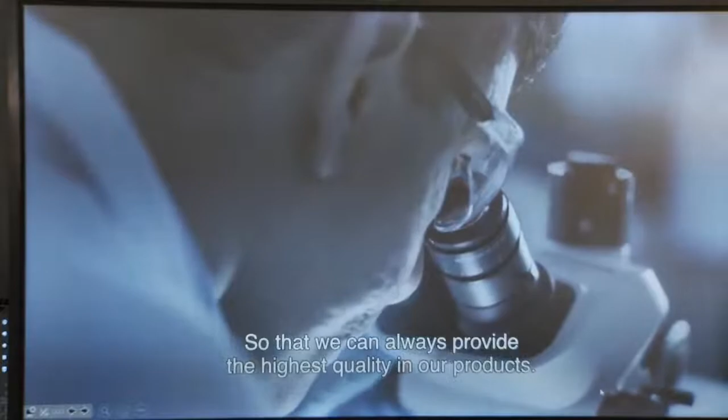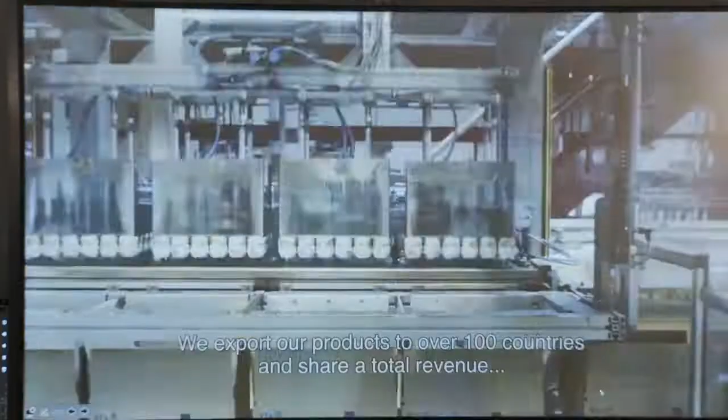40% of all land on Earth is covered with grass. For us, it's the start of everything we do. Deeply rooted within Dutch soil, but also in a rich history of collaboration, innovation and sustainability, Friesland-Campina makes food that is nutritious and tasty. Friesland-Campina is one of the largest cooperatives worldwide, with over 18,000 member farmers. Our goal to provide better nutrition and a good living for our farmers goes hand in hand with making sure we produce products in a sustainable way. Innovation is one of our top priorities, so we can always provide the highest quality in our products. A growing world population and increasing wealth mean a higher demand for food. We are at the forefront of ensuring quality nutrition for the next generation. Our history has led to 140 years of experience, with branches in 34 countries and over 23,000 employees worldwide. We export our products to over 100 countries and share a total revenue of 12 billion euros. And we keep focused on what we know is most important.

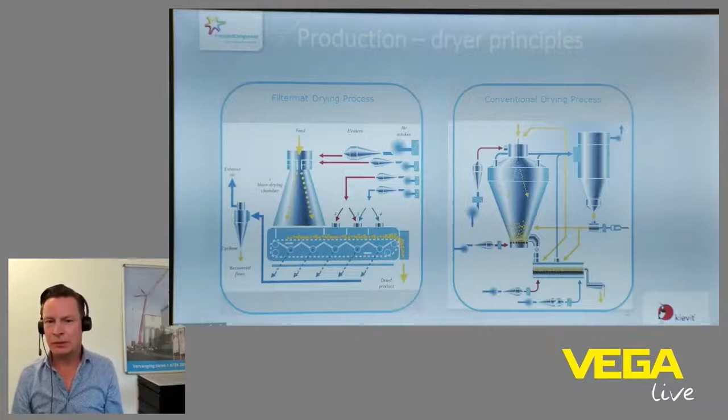A little bit about the dryers: in Meppel we have 3 filtermat dryers and 1 conventional dryer. The filtermat dryer is a special machine.

After we prepare the emulsion in the emulsion line, we pump it under high pressure to the nozzles inside the dryer. The first drying is done in the primary drying chamber. After that, the product falls on a belt, which is why it's called filter mat.

It's a filter belt, and the belt has a double function. First, the product lays on that belt, and the belt distinguishes the air and filters the air from the product. Then, toward the right, there's also the possibility for drying and cooling the product.

In the last section of the filter mat dryer, the product falls into what we call in Dutch the achterbak - it's a trough - and after that we have the rest of the dry processing and the packaging.

In the right picture, you see a conventional dryer. In this dryer, the main drying is done in a big cylinder, and after that, the last drying and cooling is done in an external fluid bed, followed by the rest of the powder handling and packaging.

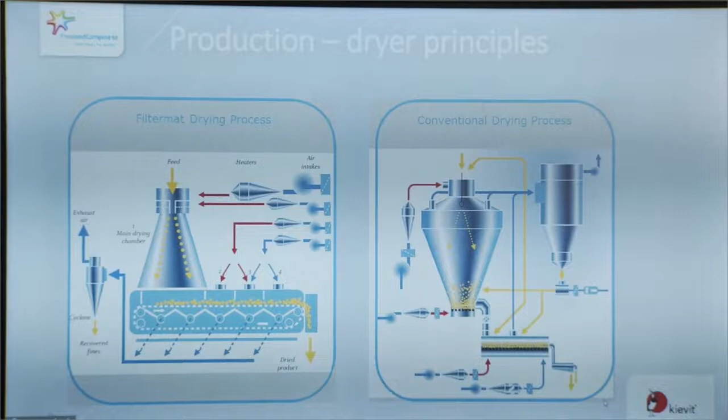For this session, we would like to focus on 3 applications within Friesland Campina, all with a different measuring principle. We're going to speak about radar level measurement, a level switch, but we want to start with a pressure measurement.

First, we would like to speak about an application found in many dairy factories: pump pressure monitoring. In this case, it's used to monitor filter conditions - if the pressure drops behind the filter, it indicates that filter is polluted and you have to start the cleaning process.

The application sounds simple, but it isn't, because if there is a failure measurement or if the sensor breaks, it can result in a huge effort, time and cost consuming to clean or fix that application.

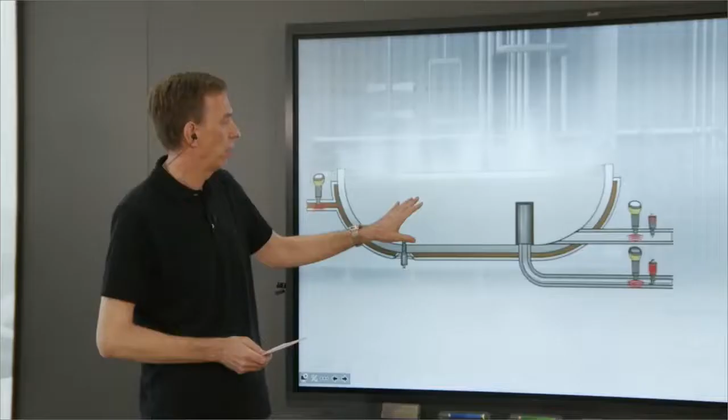We have here a small animation of that kind of application. This is a cheese factory, and here we show how this is working.

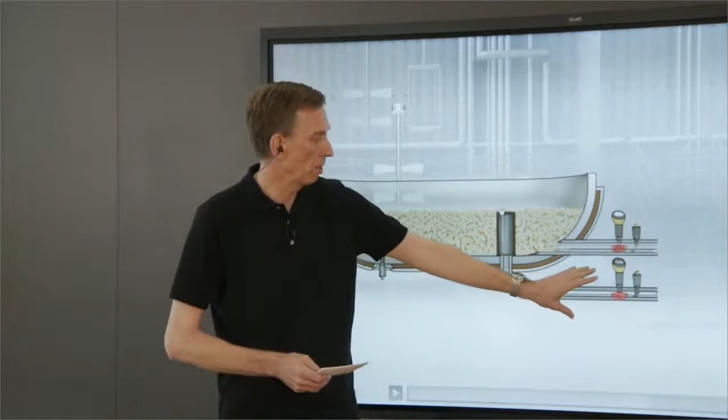You see the bassin for the cheese production and the mixture, and during that process the liquid gets filtered by this equipment. Those devices monitor the pressure of the pumps inside the pipes and indicate any pollution, showing whether cleaning needs to be started or not.

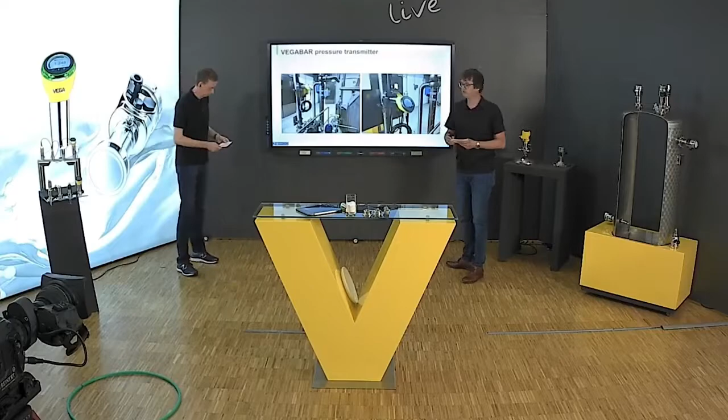This is the application as installed at FrieslandCampina Kievit. Friesland Campina was one of the first companies in the Netherlands which participated with VEGA in the field tests of our new pressure devices - in this case, a VEGABAR 38 pressure device.

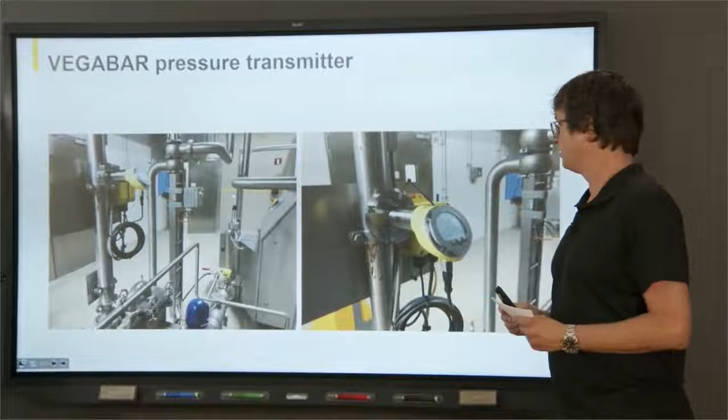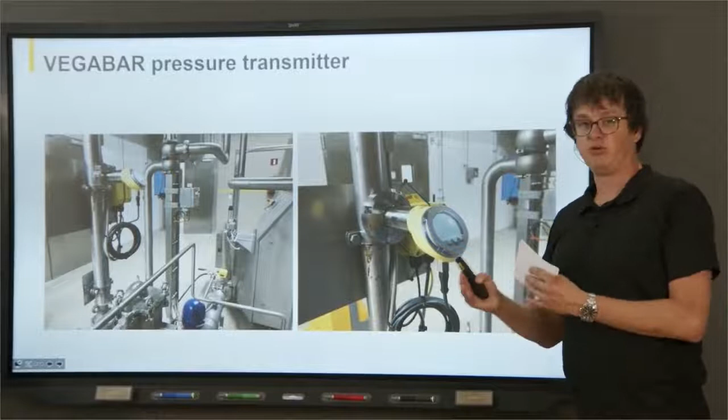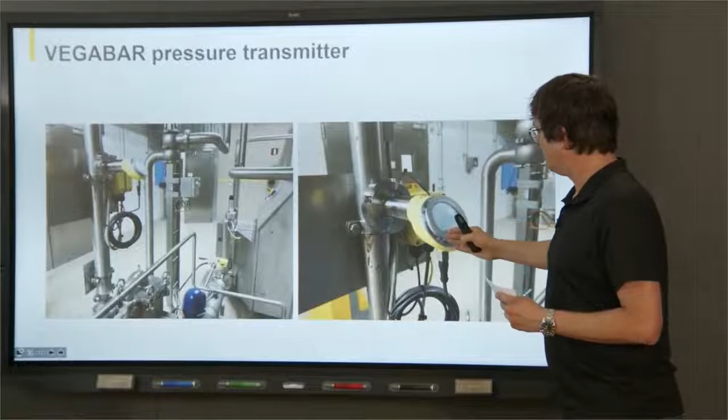What's really nice about this device is the big screen, on which you can both read the pressure the sensor measures and set up the device via the 3 push buttons on the screen. A second feature, not lit on this device but which Holger will show us in a second, is an LED light indication.

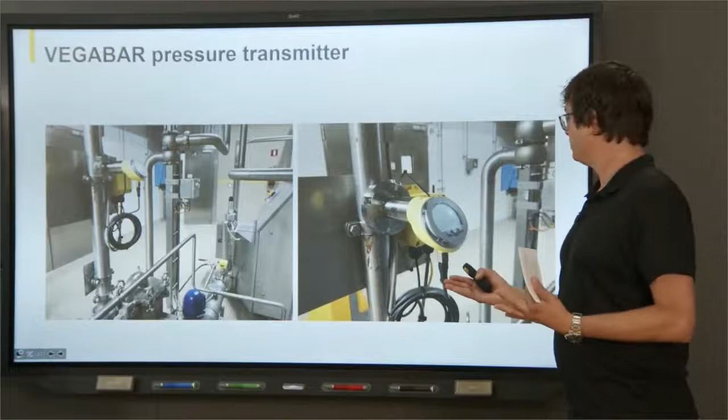You can set this up as you want for even 5 different pressure modes. So for instance, if the pressure is running within specification, you can have a green light. When it's not fully within specification but not a real big problem, you make it orange, and when there's a failure, you make it red.

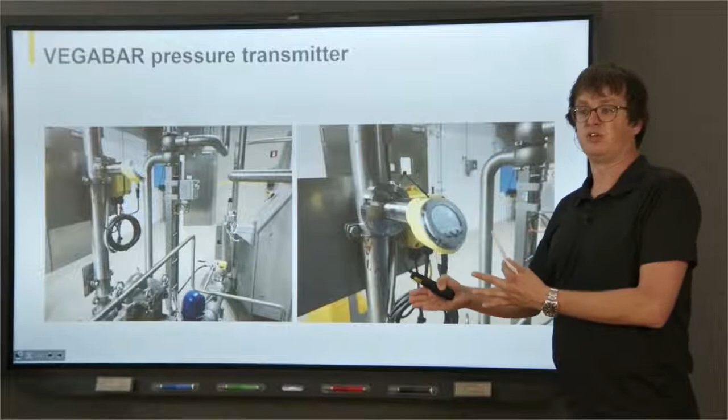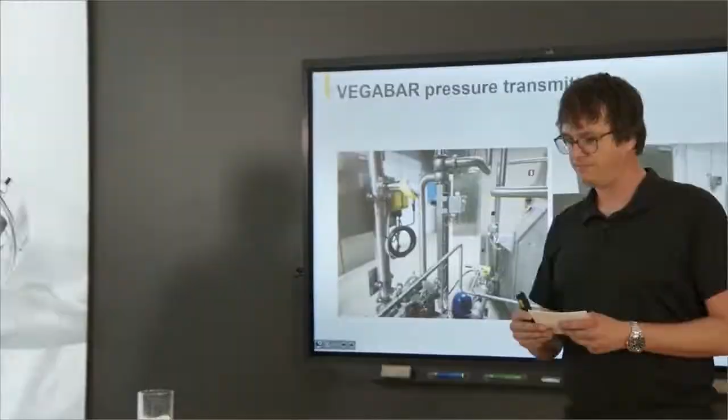You can see this indication from quite a big distance, which Holger can show on the demo device we have over here. Here you see such a VEGABAR 38, indicating green on the LED ring, which is visible more or less 360 degrees around that application.

This is a real sensor working, and we can simulate the pressure - if the pressure goes above a certain value, in this case programmed here, the green light turns from green to purple. You can decide what color you would like to indicate.

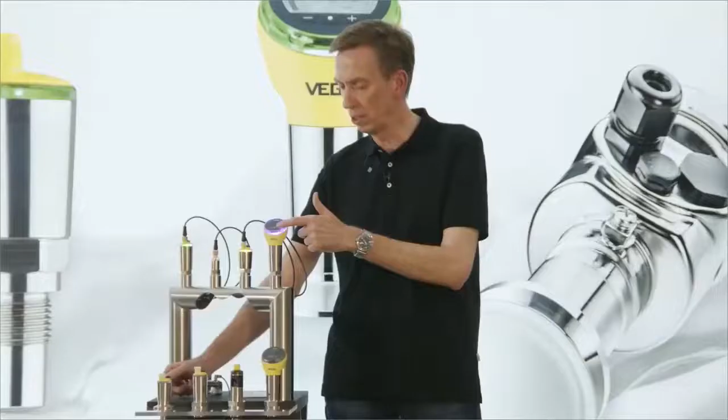We have up to 256 color possibilities here. You can use your standard values as well as your special values, and you can do this, as Rob already said, with the on-site adjustment tools or via the app adjustment possibilities.

One special thing for the VEGABAR 38 is the ceramic cell. In many applications in your market you use a metal cell, but the big advantage of a ceramic cell is the resistance against pressure shocks in the pipe or vessel, and against abrasion caused by the product itself or by solids inside the product.

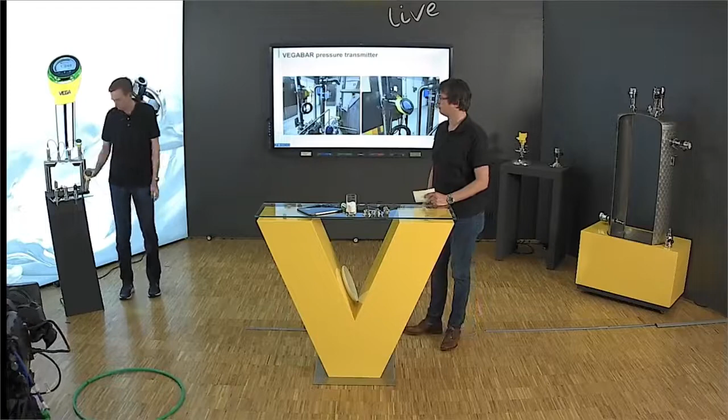Thank you, and that can be positive as well as negative pressure shocks. Sure, I think that's a nice feature.

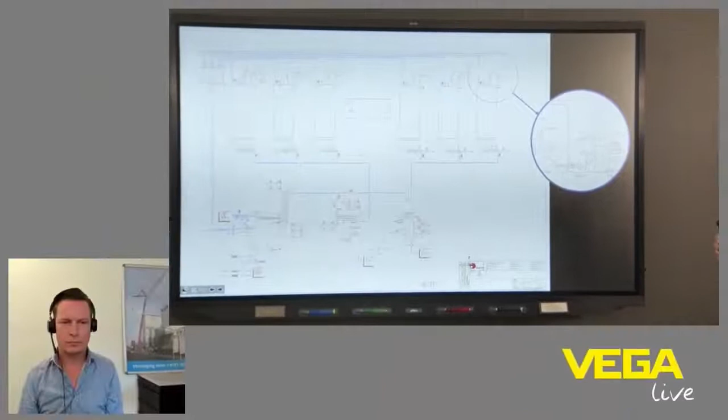Thank you. The second one is level measurement. Within FrieslandCampina Kievit, we have installed several level measurements, and I think we have some really nice pictures of the silo park.

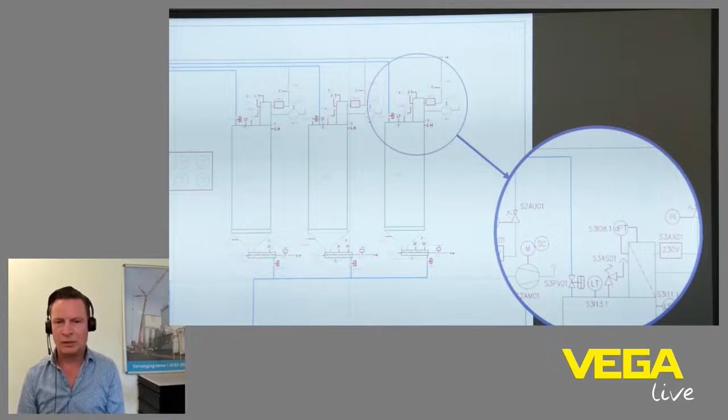Marcel, can you tell us something about your bulk silos? Yes, what you see here is our P&ID of our end product silos of dryer 1. Dryer 1 is our conventional dryer, and we have the possibility, with pneumatic conveying, to get the product into those 6 silos. What's lifted out here is the standard configuration on top of the silo.

So you see a filling line. We have an over and under pressure relief valve. You see also the filter, that's to filter the product from the pneumatic air. And you see level transmitters.

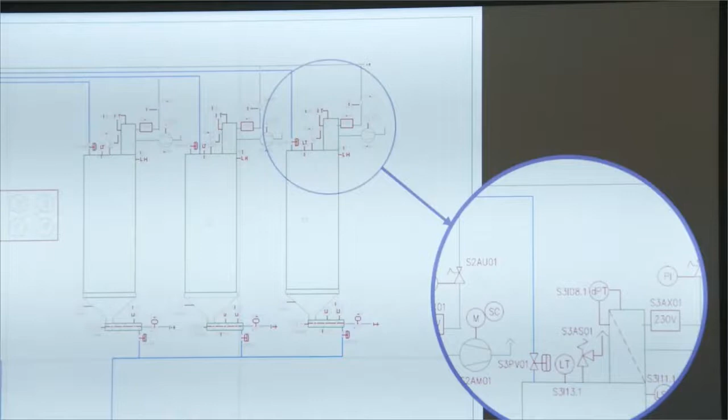In the past we only had a level detector, a level switch, so we only knew that it was full. But about 15 years ago, we decided to put in the level transmitter, the radar level transmitter of VEGA. So we have been using that now for about 15 years.

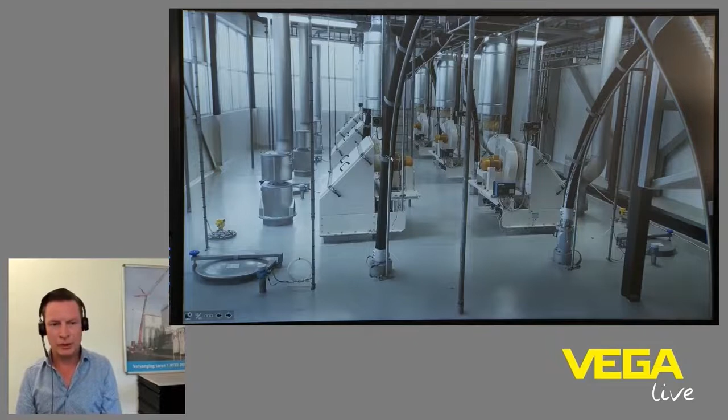In this next picture you can see the top of the silos, and you see the filling lines, the over-under pressure relief valve, also the filters, and you also see the yellow heads of the VEGA radar level transmitters.

Thank you, Marcel. And why do we find this a very interesting application, if we installed the radar sensors 15 years ago? Well, 15 years ago we started with this radar sensor, but there have been quite a lot of changes since then. But perhaps it's a good idea, Holger, to first explain radar technology in basics.

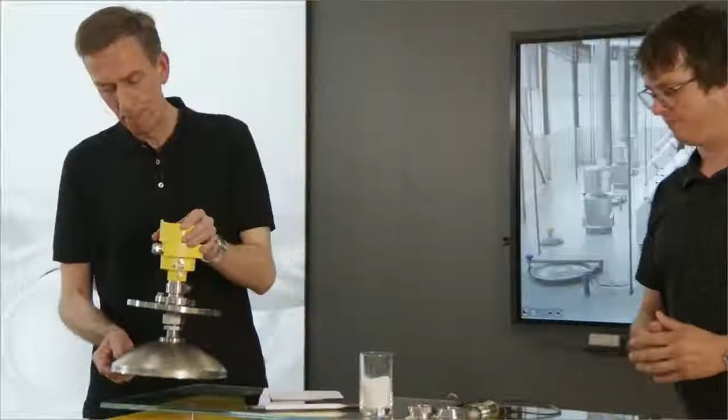Of course, thank you. The general principle of radar as a non-contact measurement principle is that the system generates a microwave signal which is transmitted from the antenna downwards to the surface of the product and then reflected by the product and received by the system again. The time between transmitting and receiving corresponds to the distance between the sensor and the surface of the product.

And if you know the height of the vessel, the height of the application, you can calculate, or it corresponds directly to the level of your product.

There are two features which are important for a reliable measurement. First is the signal beam of a radar device, and second is the dynamic range. The signal beam is important for the surface of the product to be seen by the sensor, or how many disturbing echoes the system sees. That means the smaller that beam is, the less disturbing signals the sensor gets from the vessel itself, from obstacles inside, from any disturbing things, and the better the measurement is.

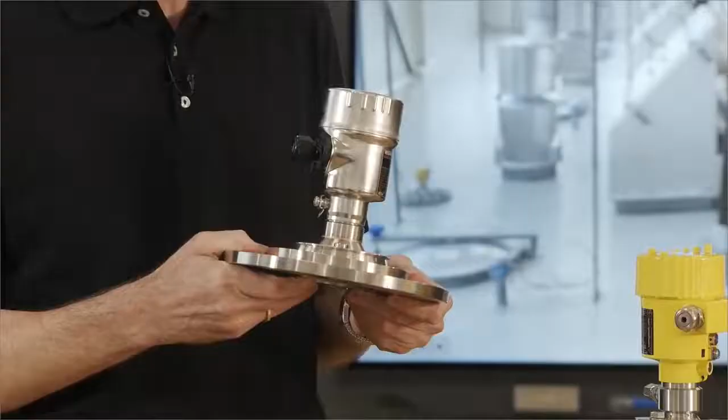We also have here a new sensor, VEGAPULS 69, working with 80 gigahertz, and this sensor has a much higher frequency, and therefore the signal beam is much smaller than on lower frequencies. We demonstrate this here with this frisbee disc, and at the same conditions, with 3 meters distance between the sensor or the top of the vessel and the product, the footprint is only that small, meaning the sensor is more reliable because less disturbing echoes are visible, and it can work much better and causes fewer problems.

The dynamic range, which I mentioned as the second point, is the capability of a radar sensor to see also very small signals. You can imagine if you have a surface of liquid, it acts like a mirror and you get 100% of your energy back. On solids, where you have different angles of response on different products, powders, granulates, you get less energy reflected back from the surface, meaning only a very small portion of the energy will be received by the sensor. The higher the dynamic range, the smaller the signals can be, meaning the more reliable a sensor is working on that application.

Yes, and next to the dynamic range, one of the things that is really important is the product you want to measure. And that's something Friesland Campina has done a lot of work on, continuously developing new products. Marcel, I think you can tell us something about product development within FrieslandCampina Kievit.

It's not only product development, it's also been challenging from the beginning to measure the level in the silos, because we make a lot of different products on that dryer. One of the main difficulties was measuring what we call a cappuccino foamer - that's a powder with bulk density below 200 grams per liter. That was always a big challenge to measure.

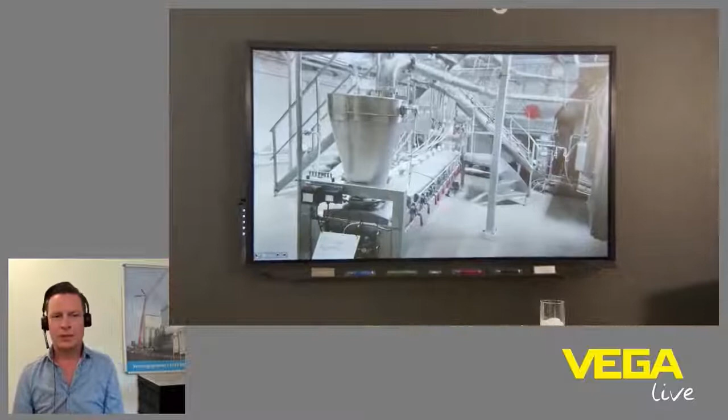The project started out with the question of just replacing the old sifter, a gyratory sifter, with a new tumbler sifter. But to do that, we had to change the complete powder handling after the dryer. So what you see here is the new configuration.

At the red dot, you see the last section of our Filtermat dryer, where the product comes out of the dryer. To gain height again, because there was a lack of height in the factory, we installed a new ascending conveyor.

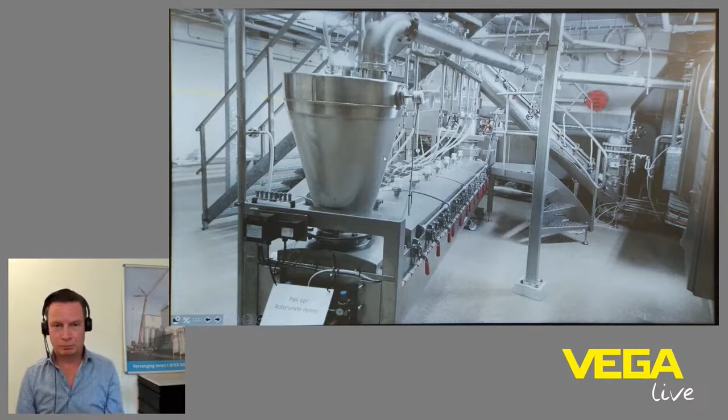In the next slide you see the new sifter. It's a tumbler sifter, it works as a police sifter, so the sifted good product goes to the packaging department, and the oversized product goes to the oversized product big bag. What you also see here, after the product outlet, is a rotary magnet.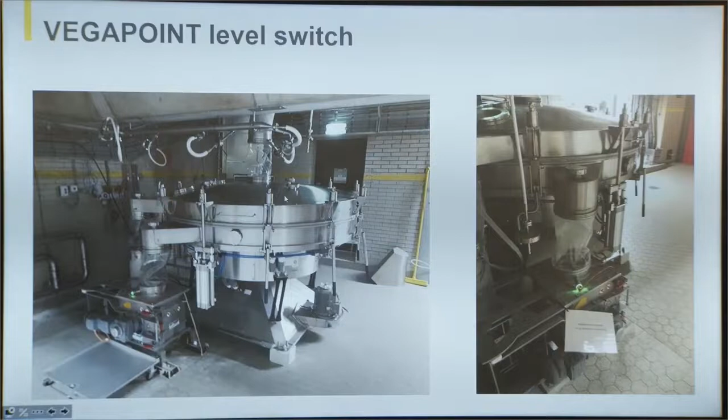And why did we place a lot of level switches from VEGA? In the past we sometimes had a failure or a hiccup in production, and then we buffered our product in the last section of the dryer. After the problem was solved, we had a lot of powder and a higher than normal powder flow, which could cause our installation to run full of powder. And when you go from one conveyor to the next conveyor but it's completely full, you have the chance that the inside of the conveyor is damaged.

The same applies when you have, for example, a blockage in your sifter. When you keep conveying powder inside the blocked machine, it's logical that the machines will break down. So that's why we installed 6 VEGA level switches to avoid these types of problems.

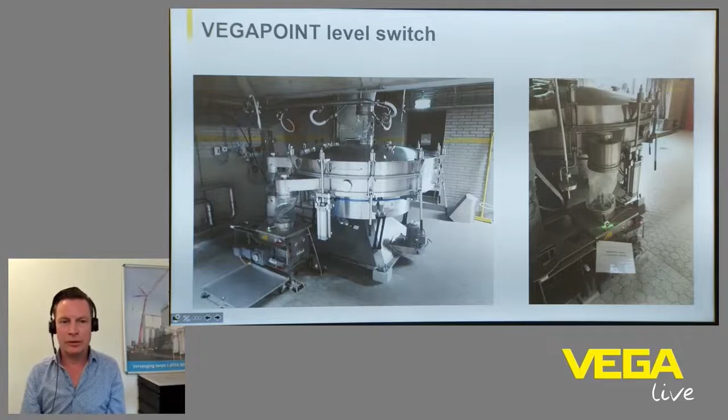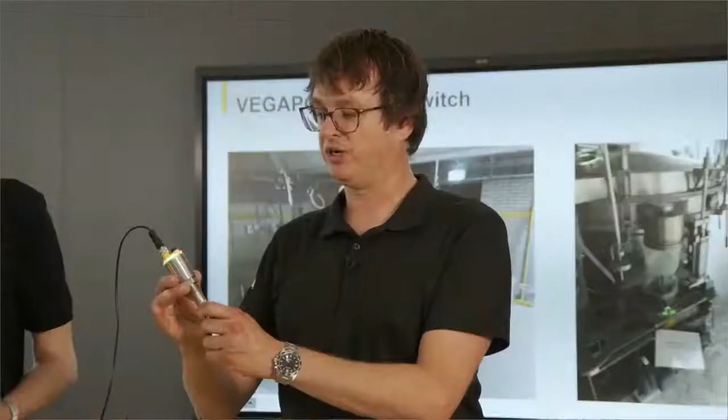Thank you, really nice application. We have one of those level switches over here, the VEGAPOINT, with the green LED at the moment, and when I cover the tip you see it switches from green to red, showing it's covered. One of the important things for FrieslandCampina is that it's really easy to adjust the sensor to the product it's measuring.

We have some of the product here from FrieslandCampina. It's a topping which they produce at the site in Meppel. Holger, I think you can show how easy it is to set up the device for this product.

Okay, this is the standard setting of the device we deliver to all of our customers. We think that 90% of all applications this setting is fine. But we will see that this setting is not good enough for this application, for this powder. You see the sensor is not switching, and therefore you need to adjust these special conditions, which is very easy.

You have to connect to the Bluetooth tool you are using, or want to use, tablet or iPhone, and just go to application, and instead of standard application, choose the user-defined application, and press OK, and now you have the possibility to adjust uncovered or covered mode.

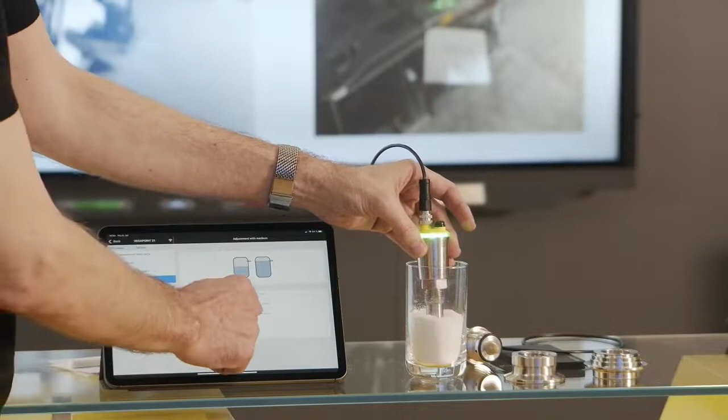Adjustment with medium, and let's say this is the uncovered mode now. You tell the sensor this is uncovered, and afterwards you bring the sensor in contact with the product, which is the covered mode. Afterwards you need to download all the settings, and the system knows and can switch now reliably with this product, which is very easy and done in less than 1 minute.

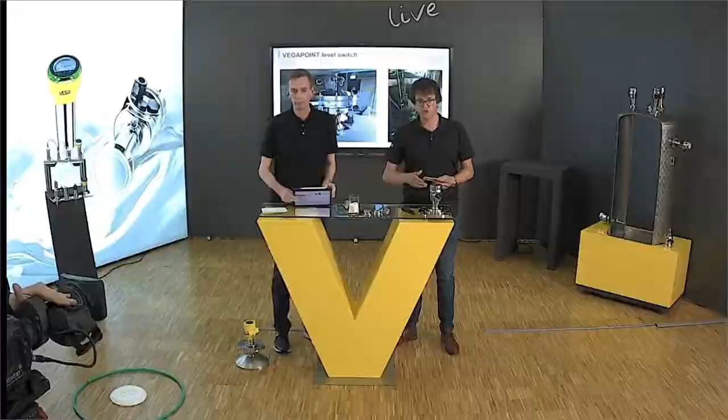Marcel, you also told us in our discussions that you spend a lot of time optimizing the process connection for the VEGAPOINT in your application. Could you please tell us something more about that?

Yes, I can. Here you see the process connection that we first used. This is the varivent male part of the connection. Especially in our application, we have falling powders, so we install the VEGA level switch in a vertical pipe.

What we saw is that with the female part, the welding part that was inside of the pipe, this was not totally flush. So what we saw is that with just a little bit of deposit because of the dust of the falling powder, just a little bit of residue in the last part of the sensor causes a detection of the powder, which we didn't like and would not want, of course.

So what we did then is use this welding connection, and we put it inside of the wall, but not flush, we put it in even deeper. So if you get deposits of dust, it will be around the sensor, and it will not detect the powder. Another thing we did is put it under an angle, so the powder has the chance to fall off. After these optimizations, it worked satisfactorily.

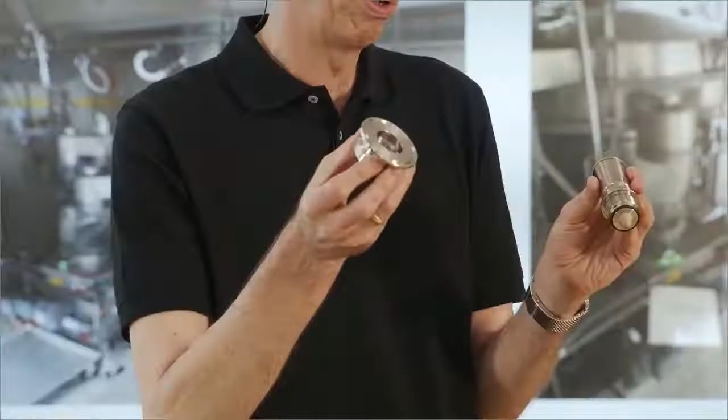And those types of adapters are available for different types of typical hygienic connections, which is, for example, here a tri-clamp connector, and other weld-in adapters are also available. So that makes the system very flexible for you as a user and keeps the stock very low, because you just need to have the adapter specialized for your application and can use more or less a standard device for all of the different vessels you have.

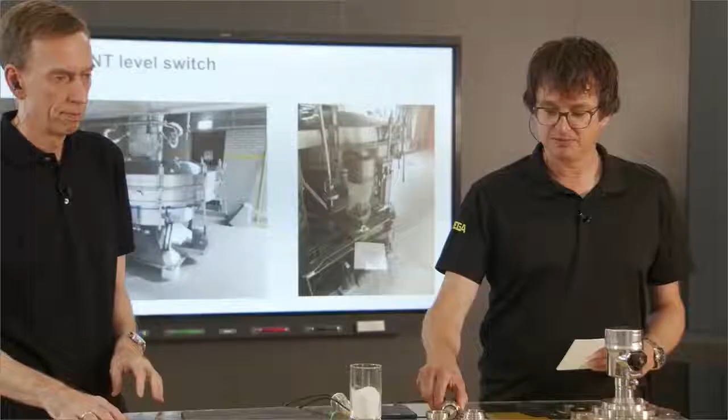Thank you. So this already brings us to the end of the applications. Marcel, a final word to you. Do you have something to add to the presentation?

Yes, one of our main reasons why we chose VEGA, for the VEGA level switch, was it was best of class when we tested, if you look at how sensible it is. But what was also a big plus for this one is the Bluetooth connection, so we could change the settings, set it up without even stopping during production. So the machines can still run, and we can get the right settings into the device.